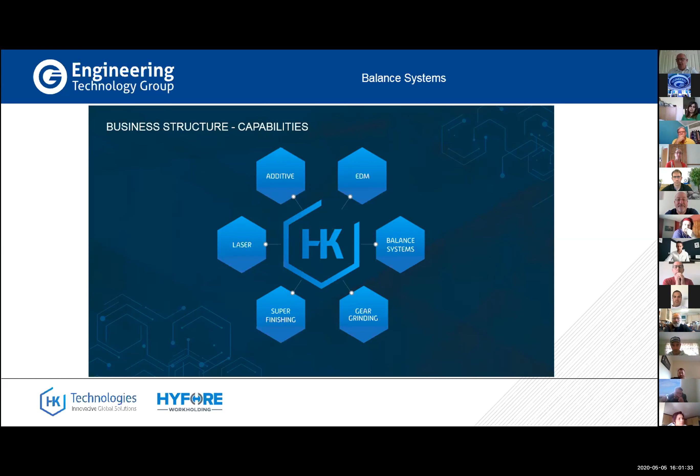HK Technologies, we have 6 core areas to our business. We have EDM sales, machinery, additive machinery sales, 3D printers. We have laser subcon marking. We have super finishing, gear grinding, and balance systems, which is what for the next 10 minutes or so I'd like to talk to you about this afternoon. Tell you who they are, what they do, and why they do it. So we'll go for that.

So Balance Systems was founded in 1975 by Gianni Trionfetti as GT Electronica, in the basement of his house near Milan in northern Italy. In 1987, they changed the name from GT Electronica to Balance Systems.

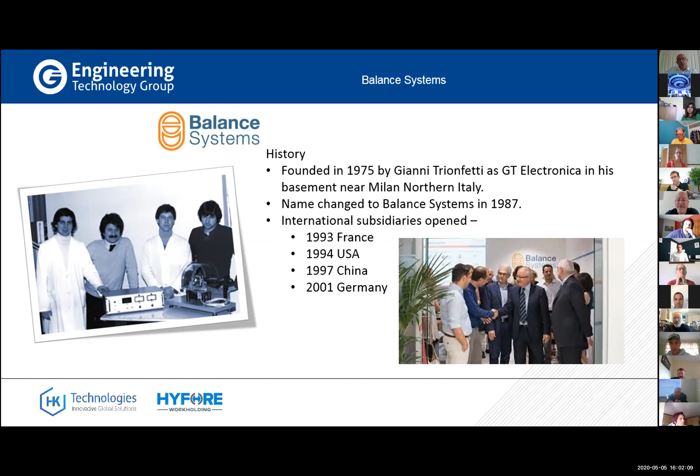As the business grew, they opened subsidiaries in '93 in France, the USA, China, and Germany. Gianni is still president of the company and still works there every day. He's still very much involved. Today, though, they've moved from the basement to a global headquarters, which is still in Milan.

There's 2 main areas to the business: balancing machines, which is what we want to look at today, and there's over 3,000 of those machines installed worldwide, producing over 1,200 million parts every year. They also have a systems control division, which produces measuring and monitoring systems for spindles on grinding machines. They also launched last year the B-Safe, which some of you may already be aware of. HK's partnership with Balance Systems started back in 2017, so it's still fairly new in what we're doing.

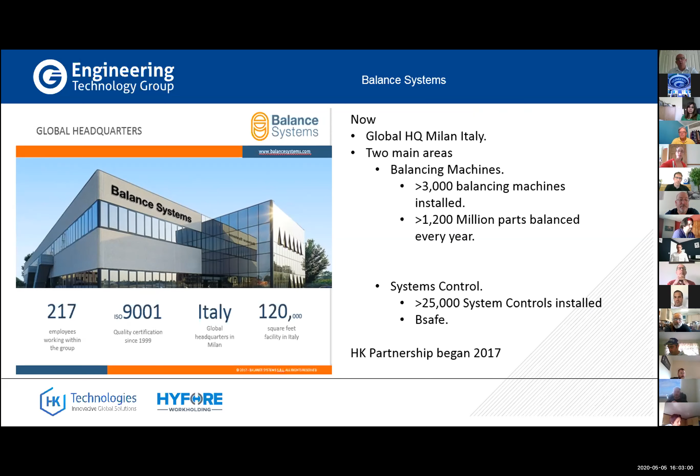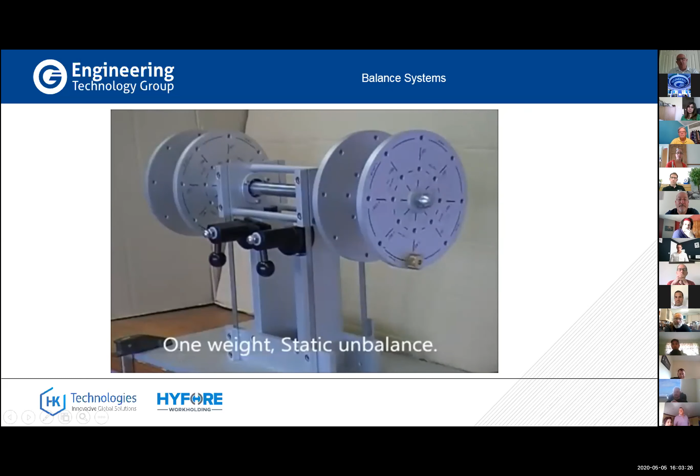So what I want to talk about first of all is why balancing. So what we've got here is a model, if you like, of what could be a motor in a washing machine or a car or something. And what's happened here is that we've created an imbalance. We've added a weight onto the front of the motor, and we're now going to rotate it. I just want to show you what happens once we rotate the motor with the imbalance in place.

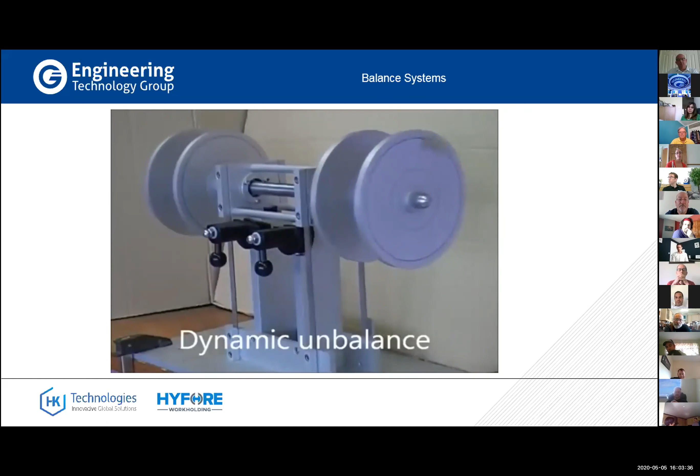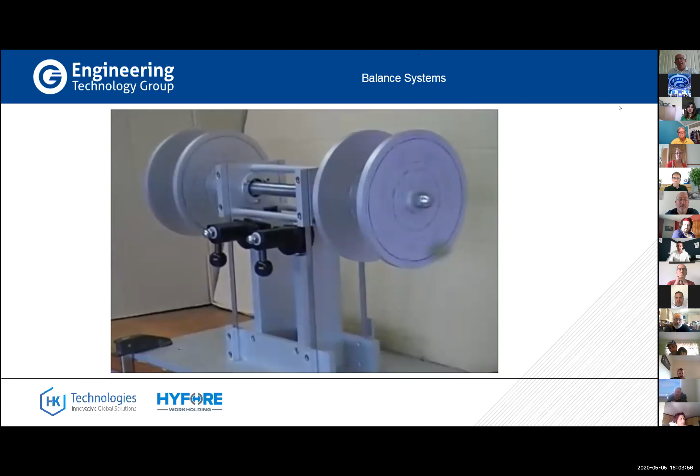So some scary stuff there. What would happen if we just turned parts out like that with that level of imbalance within them? Every part that went out there into every machine would have a very high level of vibration, as you can see by the slow motion replay on the left hand side. As you would have heard, it also becomes very noisy. And with the amount of movement you're getting on that particular part, the bearings on the machine are not going to last very long.

You're also creating a very unsafe work condition. Anything could fly off that. It could shatter other pieces of machinery within the working area that the part is in. From that, fair to say, you're going to reduce your machine life, or you're going to increase your maintenance costs. Every part of that vibration is being passed throughout whichever machine it's in, and you're going to need to replace those parts pretty quickly with the amount of work going on there. The effects of unbalance also significantly increase and become more dangerous the higher the RPM that machine is running at.

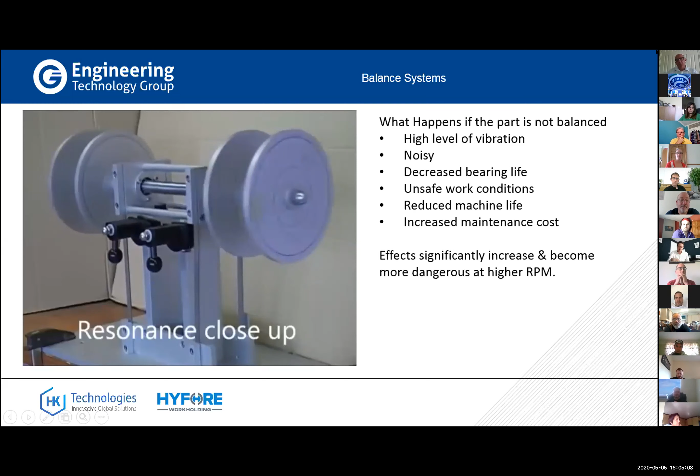So what is balancing? With balancing, what we do is the process of reducing that residual unbalance that you've just seen on a rotor, to ensure that we bring the level of vibration on the journals and bearings within specified limits. So what we would do is rotate the part at speed, measure the imbalance created by that rotation, rectify the imbalance - the methods for doing that we'll come onto - then re-rotate that particular part and re-measure it to make sure we're now within the specified limits.

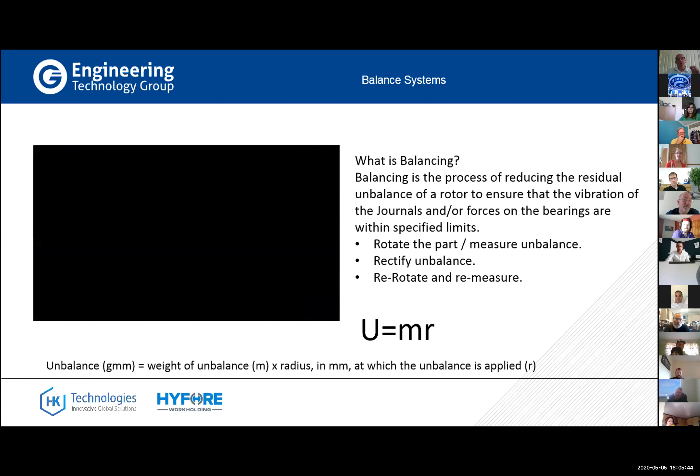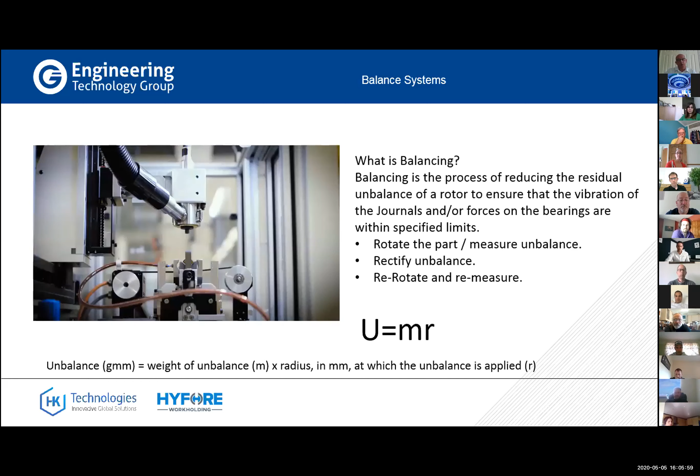For anybody who wants a bit more on that, unbalance is measured in grams per millimetre, or gram millimetres, as we see at the bottom. There's a calculation there for anybody who feels they'd like to go out and balance some parts later on this afternoon.

There is an industrial scale as well. There's an ISO 1940 standard, which gives different grades of balancing for different classes of machinery. The balance systems we tend to operate in this area, from G6.3 to G0.4, so they're smaller parts with tighter tolerances in terms of the balancing. The maximum part we balance up to is 250 kilograms.

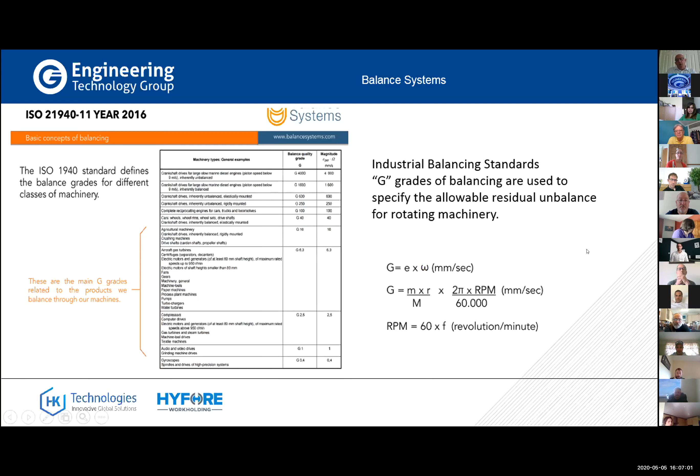Now there is at the moment, we were told a few weeks back, there is an acquisition going through with another Italian company. This will mean that Balance Systems, having purchased this company, will then be able to offer a wider range of balancing machines and move into larger crankshafts, etc., becoming a complete range supplier for the market. So how do we actually balance a part?

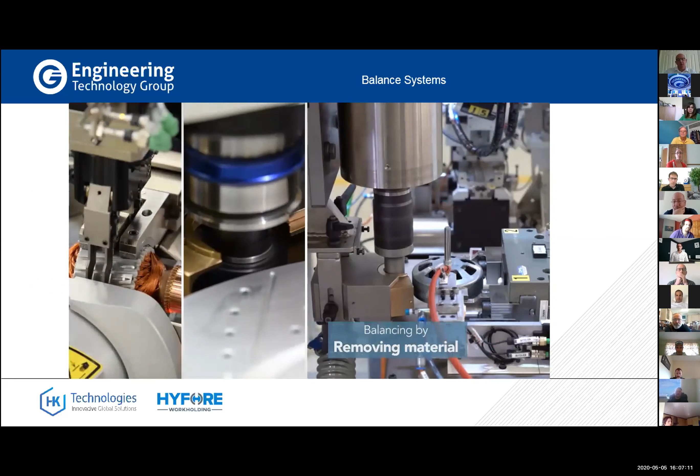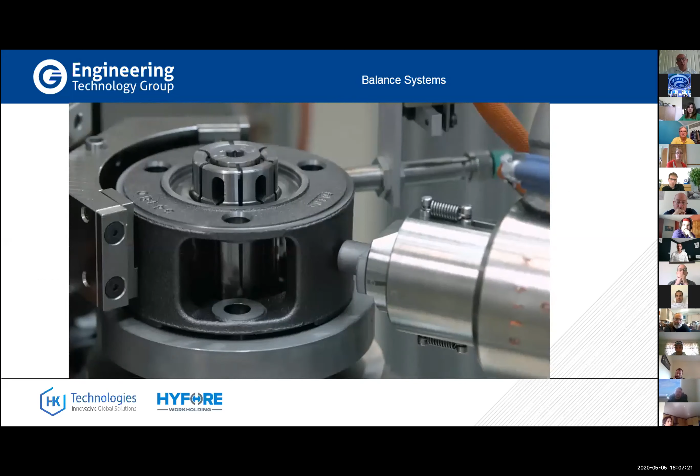There are two methods we can use for balancing a part. The first is to remove material, which we can do by using a milling cutter, as you can see here, or by drilling, as you can see in this example here.

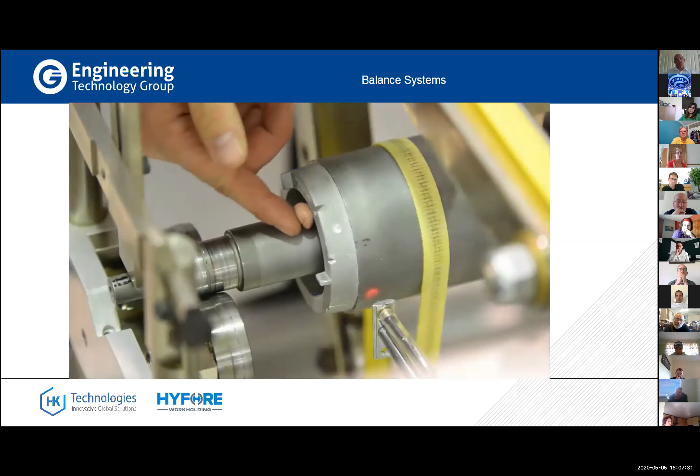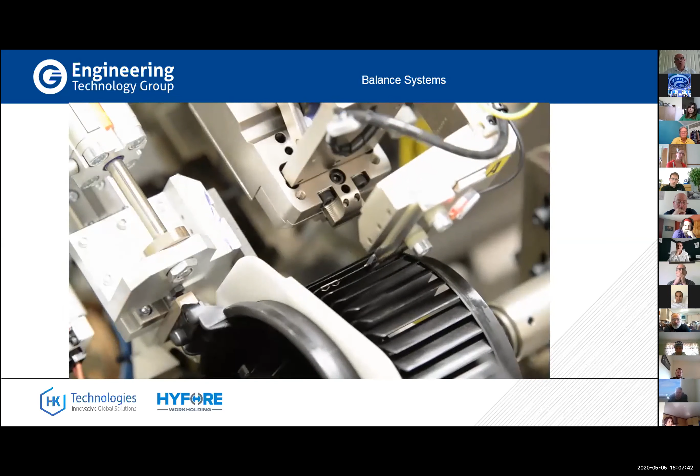So both of these methods allow us to remove material to create a balanced part, or we can add material. This can be done through clips, a simple bit of plasticine as you can see there, a weld, a rivet, a screw, or a staple, as we've shown. So all of these methods can be used to balance the part.

So just to summarise, there are two methods of balancing: either removing material or adding material. The method used will come down to the part, the process, and the customer's requirements, etc. But those are basically the ways this can be done.

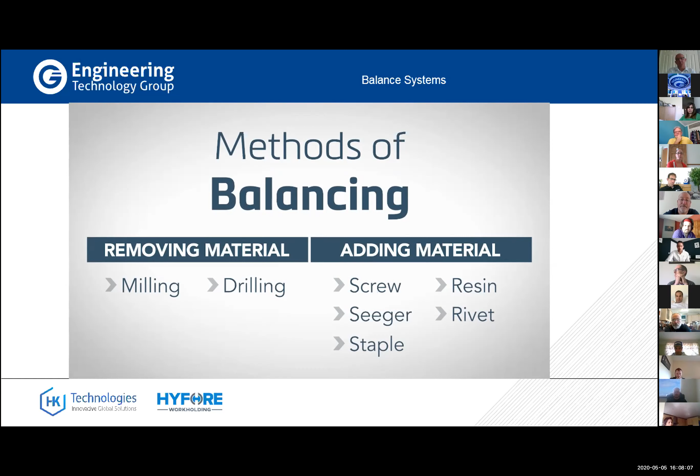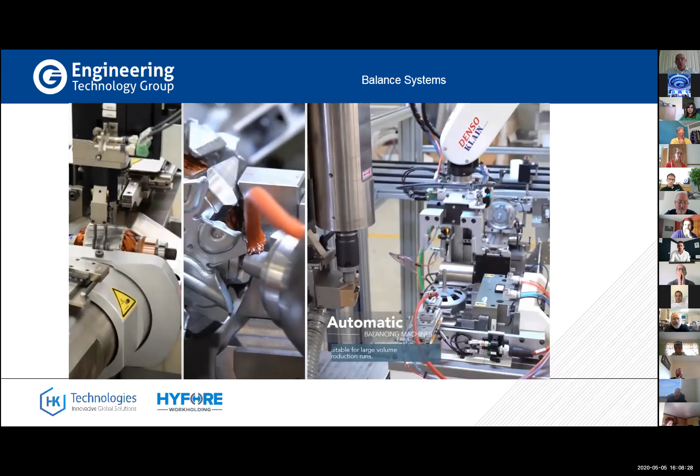The second thing to look at is the levels of automation we can use for these processes. Balance Systems offer a full range of automation, right from full automation, where the machine is picking the part, placing the part, measuring the part, and doing the removal of stock or adding of mass.

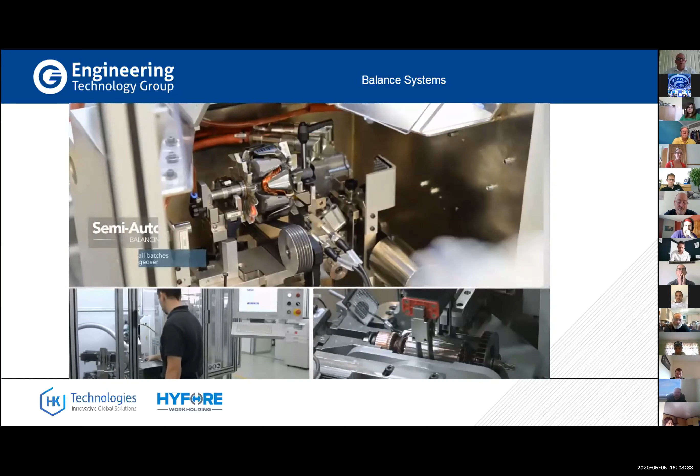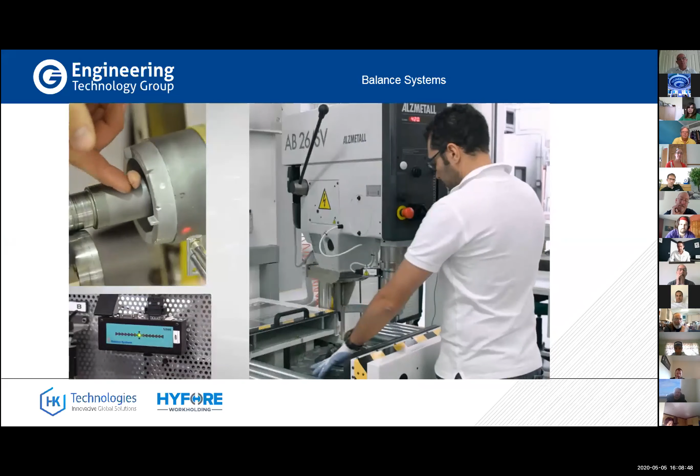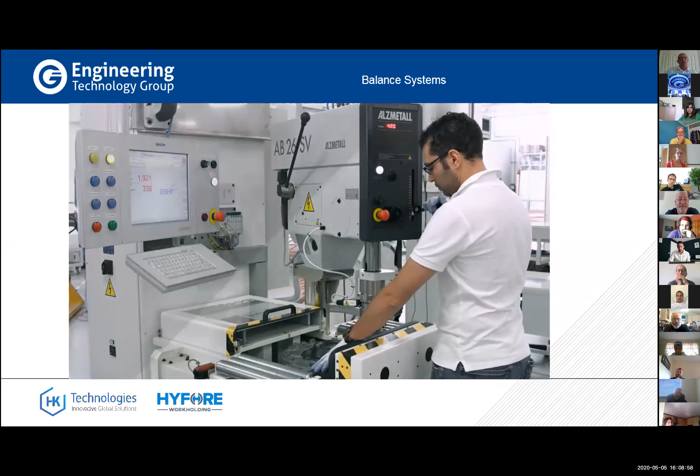Then there are semi-automatic machines, where the operator is loading and unloading, and the machine is basically doing the rest of the work with balancing and measuring. And manual machines, where the operator is loading, unloading, and removing the material, while the machine tells where to remove the material and how much to remove. So we offer a full level of automation - full automation, semi-automatic, and manual machines - all able to do the removal and additional processes for balancing that we saw earlier.

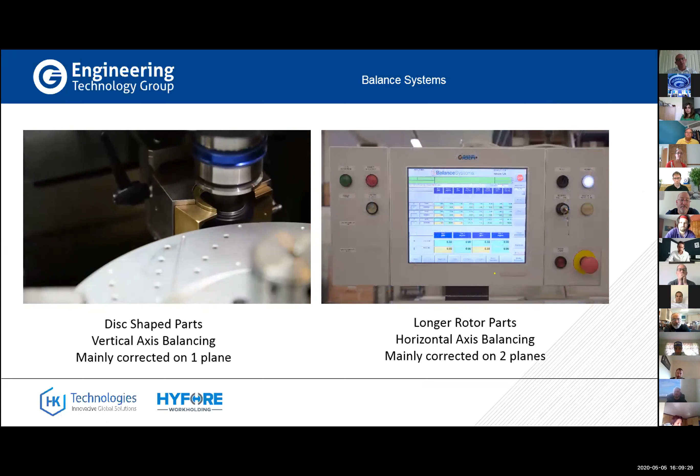We also have two different axes of machines: a vertical axis machine and a horizontal axis machine. The vertical axis machine is generally used for disc parts, as you can see with the brake disc on the left-hand side here. Here we're removing material on one plane, just removing material from this one edge in this particular example.

On the longer rotor part, which is actually a motor for an electric vehicle, since it's a longer part, we now use a horizontal axis balancing machine. For this, we correct using two planes. So we'll remove or add material on one plane at this end, and do the same over here - balancing at two planes. Any disc parts, traditionally, we'd balance on one plane. The longer rotational parts, motors, etc., we balance on two planes - in other words, at either end, which is the easiest way to say it.

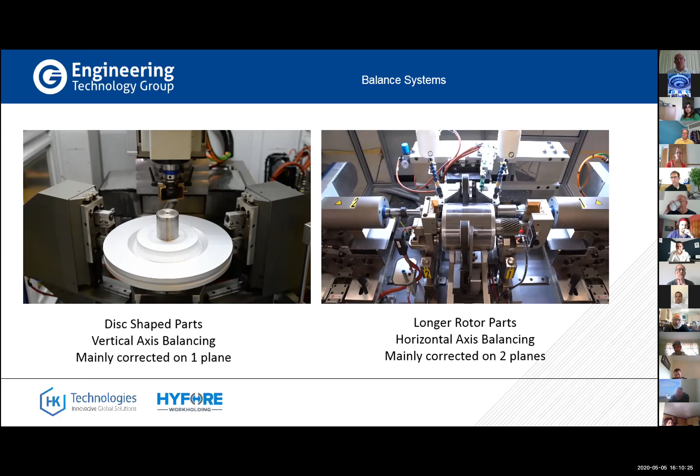So in summary, for the product range, we offer a full level of automation: manual, semi-automatic, and fully automatic.

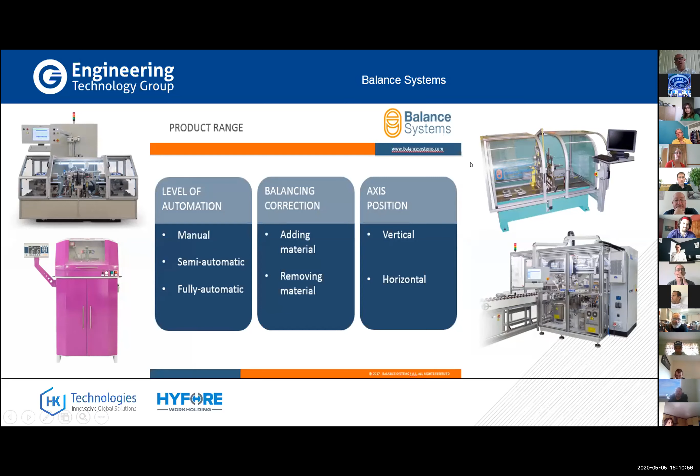We can balance correction by adding material, removing material, and we also offer vertical and horizontal axes. So whatever the customer wants, there's hopefully something within that range which can satisfy and give them the solution for their needs.

What we're looking for out there are customers producing these parts, and these are the customers we need to be talking to regarding whether we can balance those parts, because they need balancing before they go out. The effects of not balancing you've seen in the earlier video.

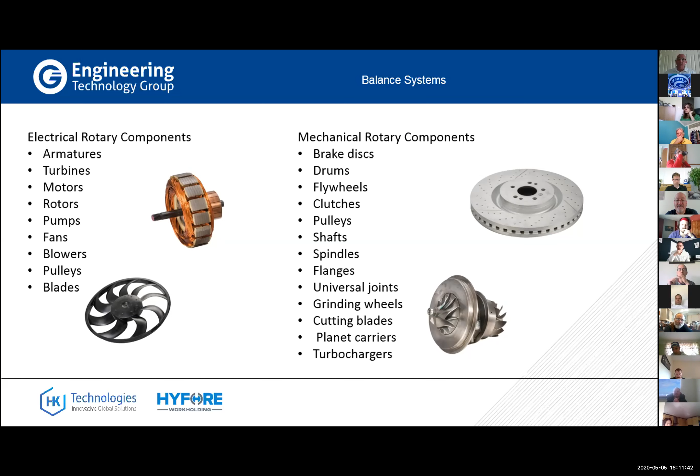But why Balance Systems? Balance Systems offer superior balancing quality, with high accuracy - their machines will balance to less than 0.1 gram millimeters. Very accurate machines. They have a touch detection system, used for milling and drilling, which compensates for mill and drill wear, so we're always removing the right amount of material to balance the part.

We have a fast balancing process. There's something called the unbalance reduction ratio, which sounds complicated, but basically means we get it right first time - 99% of the time. So it takes one go to balance a part 99% of the time.

We also have multi-station configurations, as you saw earlier with the automated parts, with the 4-arm indexing unit, giving high-speed changeover of parts for fast balancing and retooling of machines. For example, one operator on a single station machine balancing large brake discs might want to change to a smaller size disc - that changeover can be done in less than 5 minutes by one person, so it's very quick tooling changeover.

There's high machine versatility - all the machines are modular, scalable in design, and come with standard or customized solutions. We have a wide range of options available, for example part labeling for identification, QR codes, etc. The milling correction on the machines uses 3-axis interpolation, so we can move forwards, up and down, and sideways.

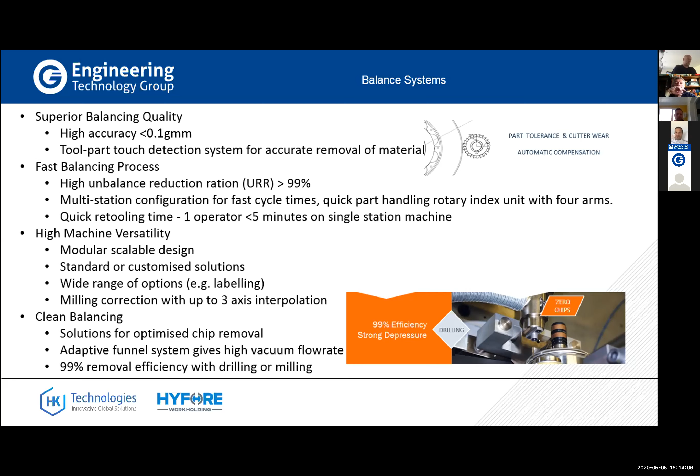Another important thing when removing material, particularly chips, is making sure those chips don't fly into the machine and cause damage, or if you have a part like a shaft with a magnet on it, you don't want chips attaching to the magnet as it affects the balancing. So we have a very high efficiency extraction system with an adaptive funnel giving a high vacuum flow rate, and we can remove 99% of chips from drilling or milling within the machine, making it very efficient.

Within the range of machines, we have 45 different machine configurations as it stands at the moment - I won't go through all of those, you'll be pleased to know. But each of those configurations can be made bespoke to customer solutions. And with the range now on offer, along with the acquisition we know is taking place of another company, Balance Systems will be able to offer a range of machines second to none in the marketplace, with quality also second to none.